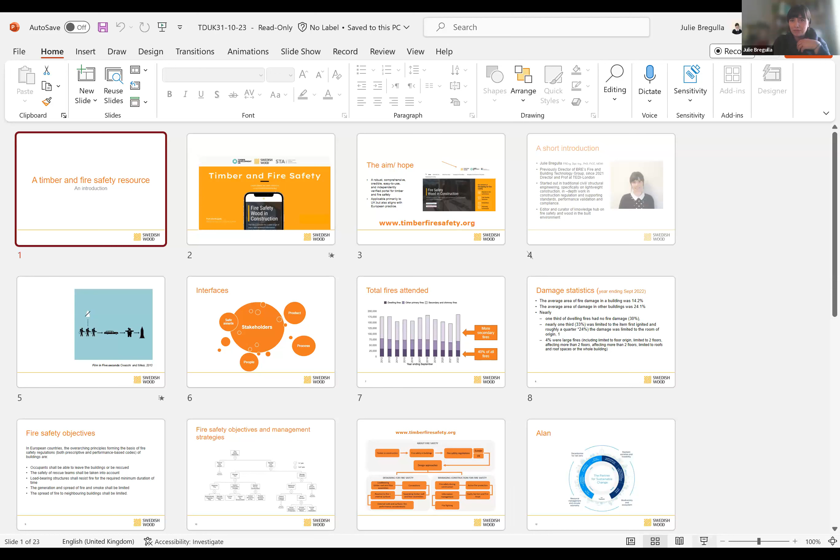So here we are. I hope Tabitha and team could confirm that you can see that. Does this work? Not full screen yet. Yeah, perfect.

Just a very quick introduction to this new resource, which has been developed together with Timber Development UK, the Structural Timber Association, and Swedish Wood. The aim and hope for this site for all three founding partners is to provide a robust, comprehensive, easy to use, but also independently verified portal for fire safety and for timber specifically. It's applicable primarily to the UK, but aligns with European practice. So when you see some regulations quoted, they are UK regulations, but it links back into European regulations and standards as appropriate for use in the UK.

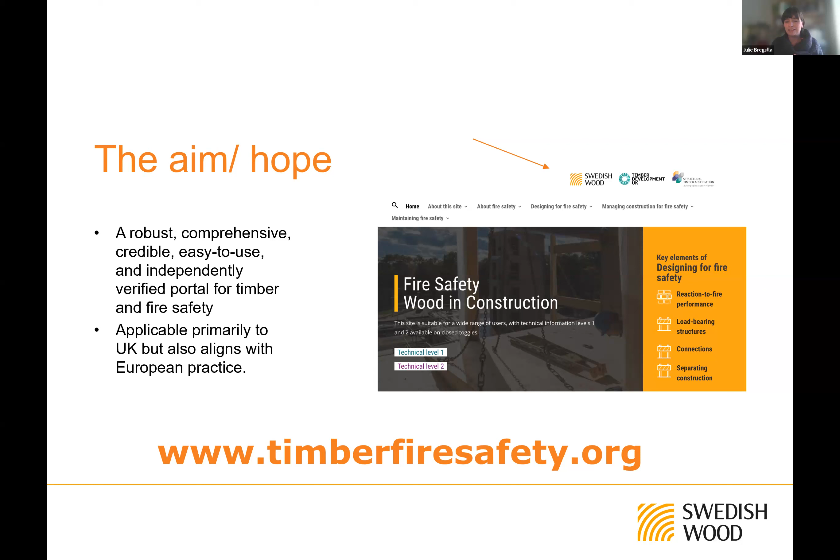It is really, really difficult. Fire safety is a hugely complex subject. I will not endeavor to be as eloquent as these two Italian illustrators that are able to communicate some of these really complex and long movies in just 5 seconds. I guess you've all guessed by now what movie that is. So I won't be able to be that quick with it. I think the main reason for that is because the interfaces around fire safety are just so complex. We're talking about safe assets, the products that we use, the processes by which we employ these products, but also the people that deliver them. So as such, it's a really complex field, and the website is here to try and help with navigating some of this complexity.

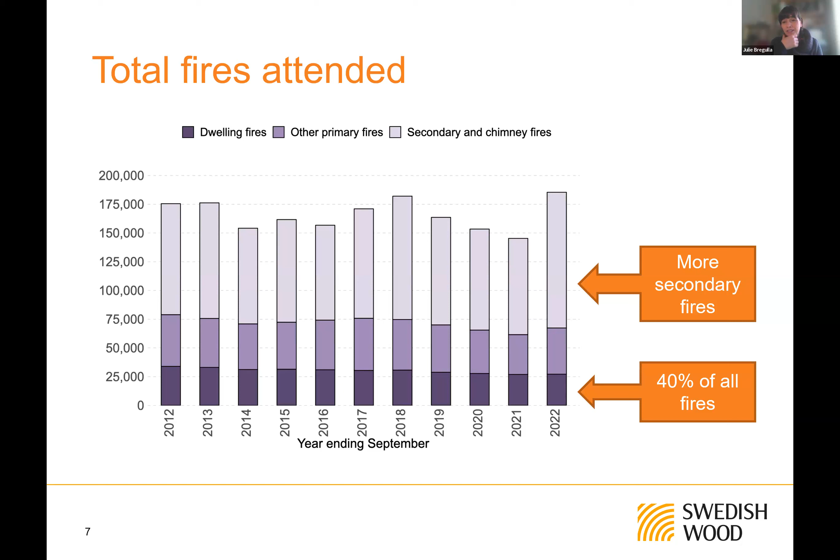It's really important. This is just the latest statistics for the UK on total fires attended in year, and you see the amount and number of fires that we see every year. So fire is a real design case. It's something that's assumed to happen once in the lifetime of the structure.

This is also an interesting statistic that I normally bring up, about the statistics of damage that we get when a fire does occur in a building. The average area of fire damage, from the statistics the UK publishes every year, is about 14.2% in dwellings, and in other buildings about 24.1%.

In 1/3 of all dwelling fires, there's no fire damage at all. In nearly 1/3 of all fires, we limit the damage to the item first ignited. And really only 4% of all fires are large fires, meaning they spread beyond the floor of origin or affect more than 2 floors. So the aim is to enable the fire to be controlled at source quickly and efficiently.

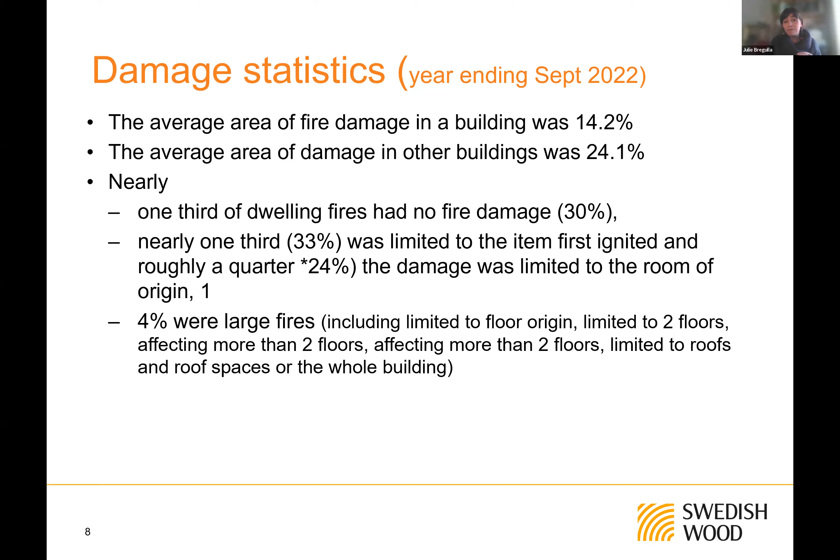That meets the fire safety objectives, which are overarchingly the same wherever you go in the world. There are 5 main aims: that occupants shall be able to leave the building or be rescued, that the safety of rescue teams is taken into account, that load-bearing structures resist fire for the required minimum duration, that we limit the generation of smoke and spread of fire, and that we limit fire spread to neighboring buildings.

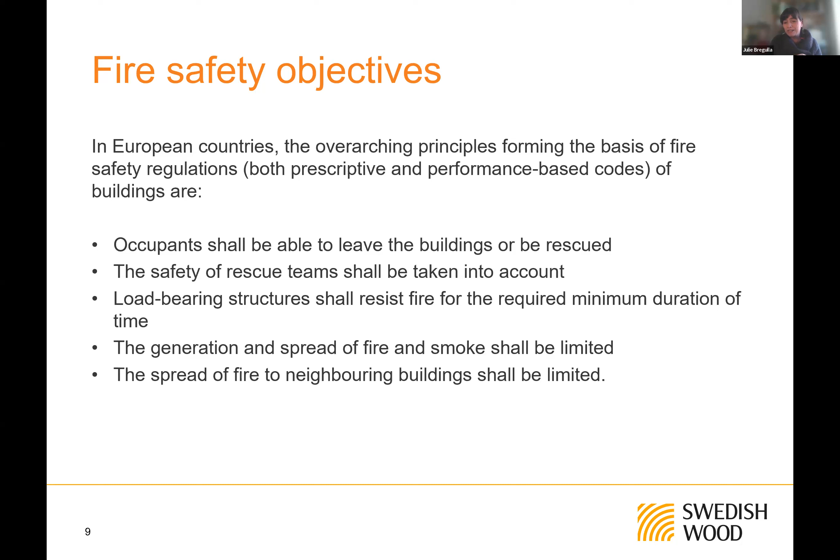These underpinning principles are where all fire safety expectations come from, and the way that we manage those and actually implement them in a completed structure.

We're not going to go through this in much detail, just to give an overview. There are always national regulations about how we prevent fire ignition, and another set of measures for managing the impact of a fire when it happens. We split that into 2 subsets: suppressing the fire, controlling combustion, and containing the fire within the construction, and what we do about the exposed structures.

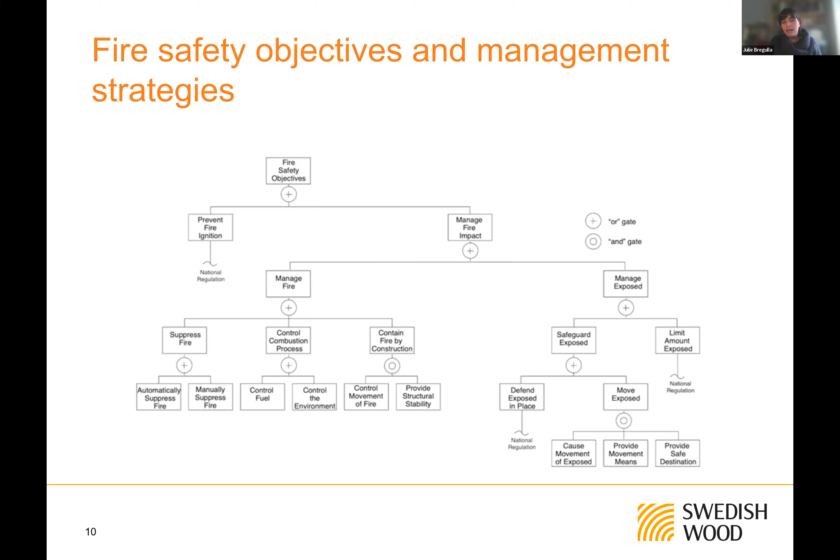Fire safety deals with all these aspects and how we deliver them. At the top there are foundational principles - where we see timber in construction, what we aim for when designing for fire safety in buildings, what regulations apply in Europe and specifically the UK, their interactions, and the design approaches available depending on the type of structure and application.

Then there are 2 pillars: how you design for fire safety around load-bearing walls and constructions, connections, separating walls, surfaces internal and external, and how we manage construction for fire safety at the start, during construction, and through life as we maintain and occupy structures.

This is just to give a quick intro to all the content covered, and Alan will show some of those principles in application. So over to you, Alan.

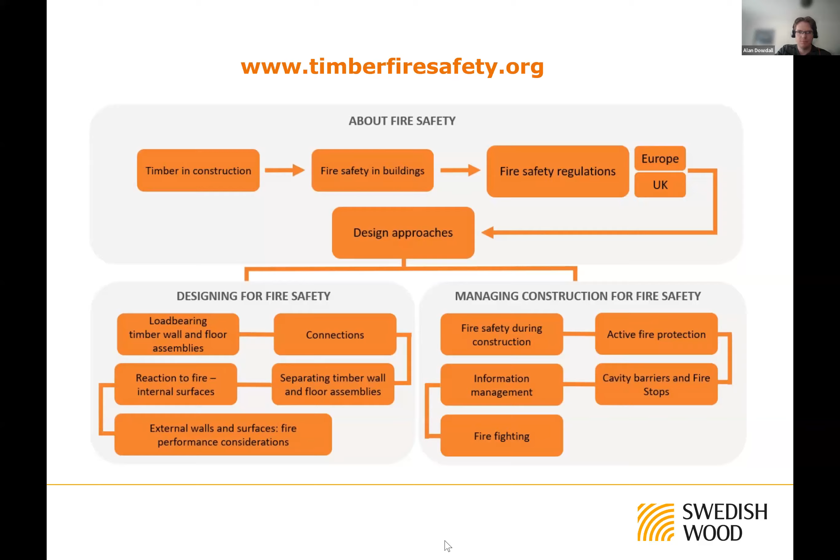I'll stop sharing now. Okay, and then it's over to you. I shall share my screen. I'll just stay not on mute until I can see it, so you know it's happened. Not quite yet. It's there. Okay, so I'm going to go full screen.

Thanks, Julie. My background is in structural engineering, I'm a structural engineer, that's what I do. So I'm going to focus these slides from a structural engineering aspect for timber and fire. I've got about 30 slides, so I'll try and whiz through these pretty quickly.

This is the flow I want to go through. I've got some project examples, which are images of projects, and there'll be a theme through that which I'll explain at the end.

Then I'll get into the nitty-gritty about design scenarios when it comes to fire, which is an accidental design scenario case as opposed to a typical case. There are differences in approach taken in the design of a structure between these 2 types of scenarios.

Following on from that, we'll have a chat about how timber behaves in a fire, how it reacts to elevated temperatures, and a very quick run through examples of detailing, particularly around connections, how we look to protect connections in timber.

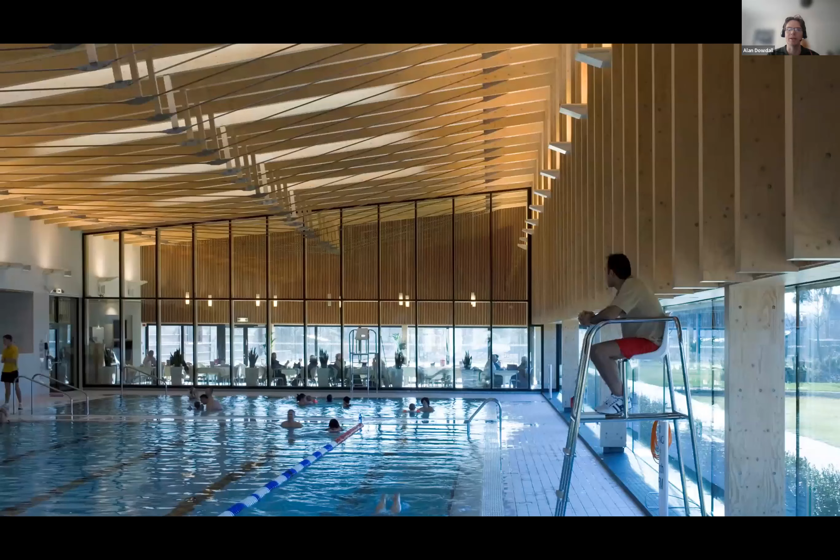This is a form-based swimming pool. This type of building is single story on the ground, and the structure is really just supporting a roof. So in terms of fire risk, it's actually quite a low profile one, and we don't tend to put a fire time on the roof in terms of design from the structure point of view. But it's quite a nice sort of frame that you get with the timber.

Other types of timber buildings we've worked on before - this is Beechwood West, which is low-rise residential, using timber modules. If I skip on, you can see this is one of the modules that goes into one of these houses, and that has a different fire risk profile. Mainly there's a lot of party walls that need to be dealt with, which we had to detail to allow for increased protection in those lines.

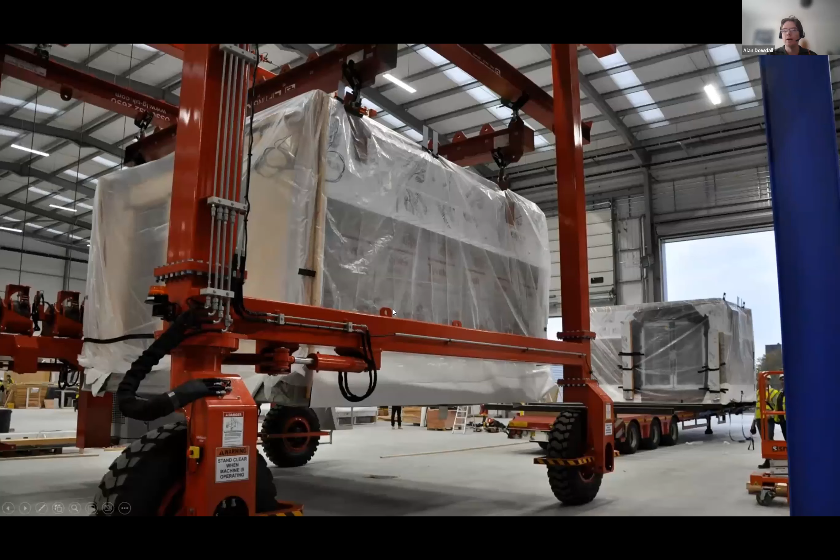We move into different scales of building, from cultural and residential to educational. We're getting into a different type of building, which comes with different design aspects to consider, as you've got a much bigger space to deal with. This is a school in Norwich, where we have a lot of exposed timber, but it's not high-rise per se.

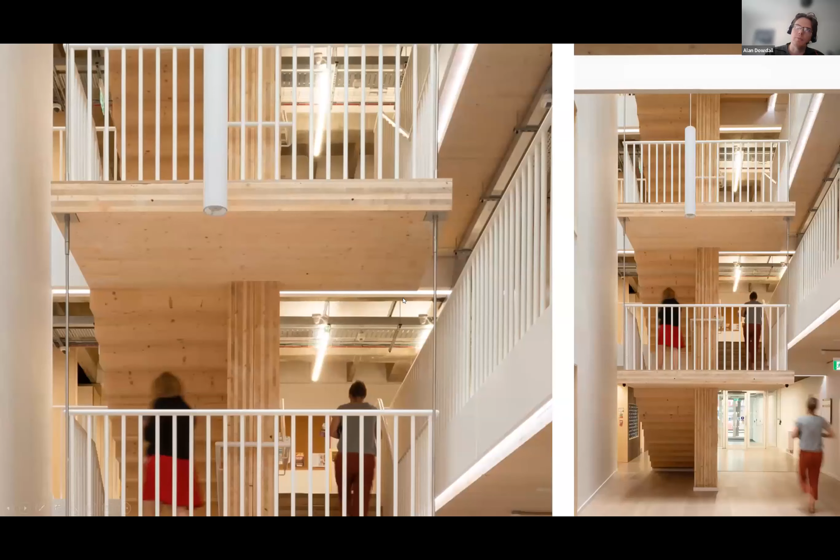Moving forward in time, what we see today is more commercial buildings. This is an office building in London, about 5-6 stories, again an extension to an existing building, done from mass timber - glulam and CLT. These are all different types of buildings, and they all have different sort of rules you need to follow when designing them from a fire aspect.

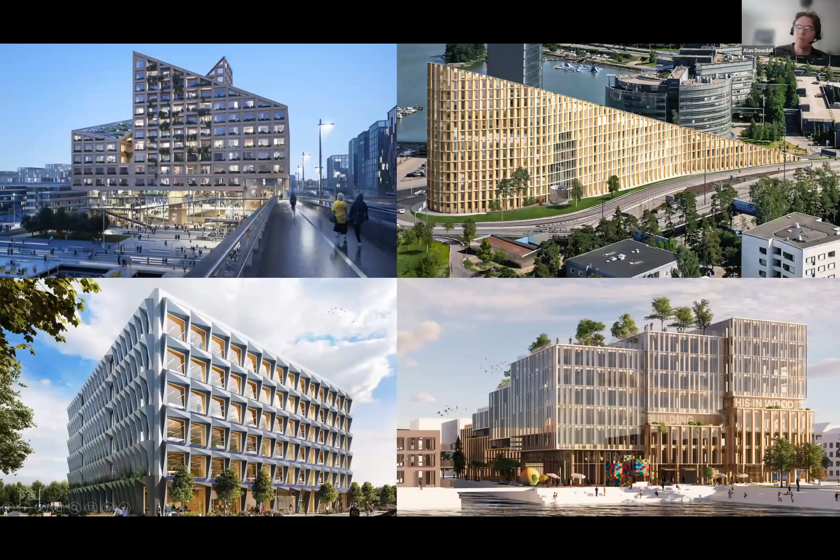Looking forward to where timber is going, this is a snapshot of some pipeline projects in the works around the UK and Europe, which are quite large scale. So there's a trend of buildings increasing in scale using timber for various good reasons, mostly around the carbon and lightweight nature of timber, and they all come with aspects of fire that need to be considered in the design. Obviously the bigger the building gets, the bigger the risk profile is for that scenario to be considered. So just taking a little step back from that and moving on to the next stage.

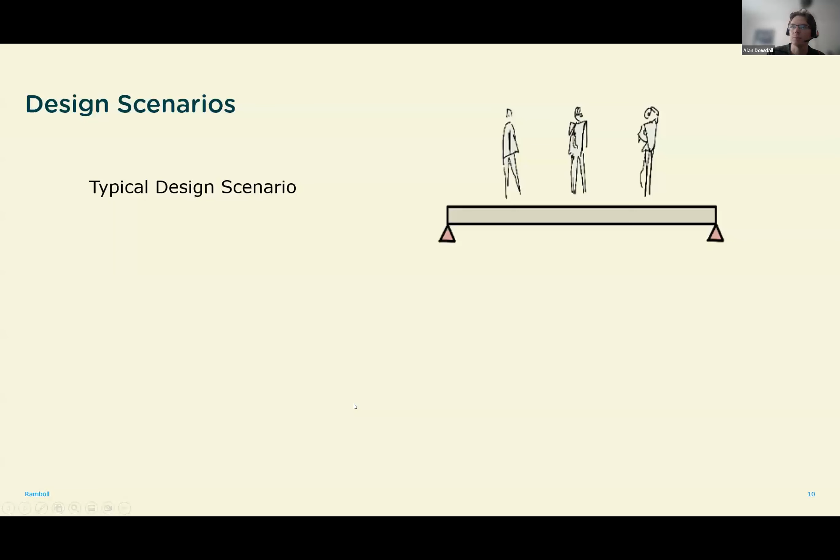Focusing in on structural engineering, and talking about how we consider our design scenarios from a typical loading aspect of a building to an accidental scenario, which is a fire, for example. So we've got the typical, and then we have our nice little graphic there that shows perhaps a fire scenario.

We compare how that works with some of the loadings and factors in, let's say for example, an office loading. We have a certain amount of loading which is more in the upper percentile. For an office we'd have 3.5 kilonewtons per meter squared, approximately 5 people per meter squared, which is quite a tight range - certainly an upper limit of what a floor would most likely experience. Some offices from studies years ago show they're more like 0.5 or even less in reality.

When it comes to an accidental design scenario, there's more of a pragmatic approach, in that the likelihood is you're going to have a lot less. So if we apply the office theme again, our loads are about half - certainly the imposed load, so the people and furniture is taken as about half. The actual finishes on the floor are still the same; they don't change.

Then we think about our factors of safety for design of strength. In a typical design scenario we're upping those loads - for live loads by an extra 50%, or 35% if it's just the finishes or dead loads. When it comes to accidental scenarios, we're keeping our factors at 1, so it's more of a realistic approach. That's how we deal with loading and our safety factors.

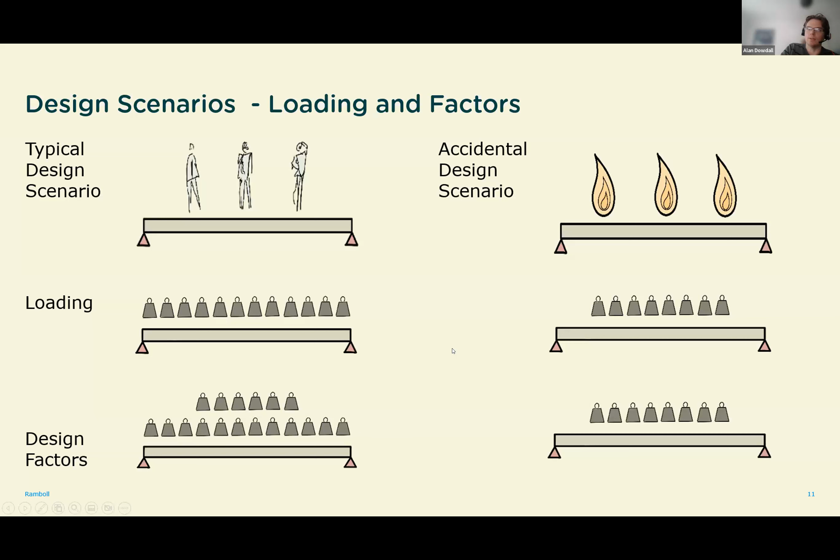When we then look at material properties, hopefully you're aware that in design of structural materials, we have a distribution of properties that any material, whether steel or concrete, will have. In design of our structures, we're taking the 5 percentile as the characteristic properties - similar to how we take the upper load for the typical design case. With timber, it's such a variable material that the Eurocode takes a different approach, where rather than the 5 percentile, that can be increased to a 20 percentile.

So for a glulam, you can get like an extra 15% capacity out of its strength and properties. You combine those two things together, you have a slightly reduced loading in an accident scenario and slightly better properties in the accidental scenario. Combine that with when we look at char later on, how if you have a reduced section, you combine all these together to work out the utilization of your structure and design accordingly.

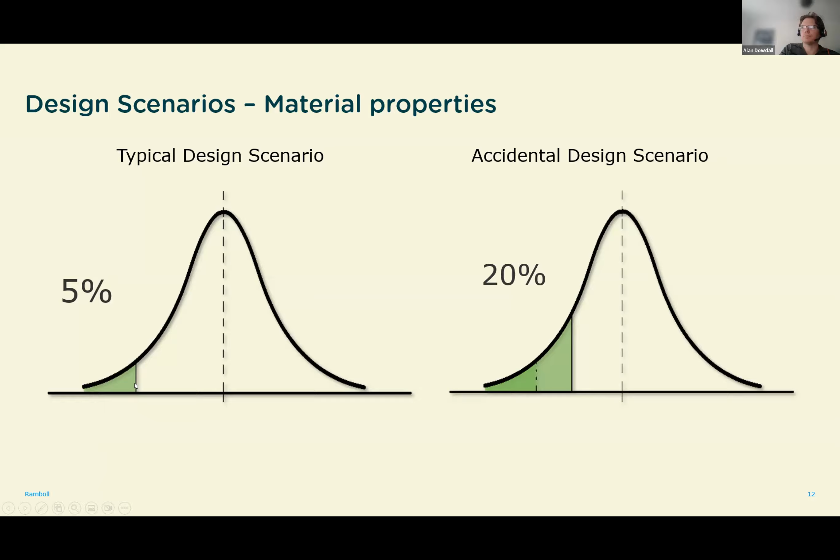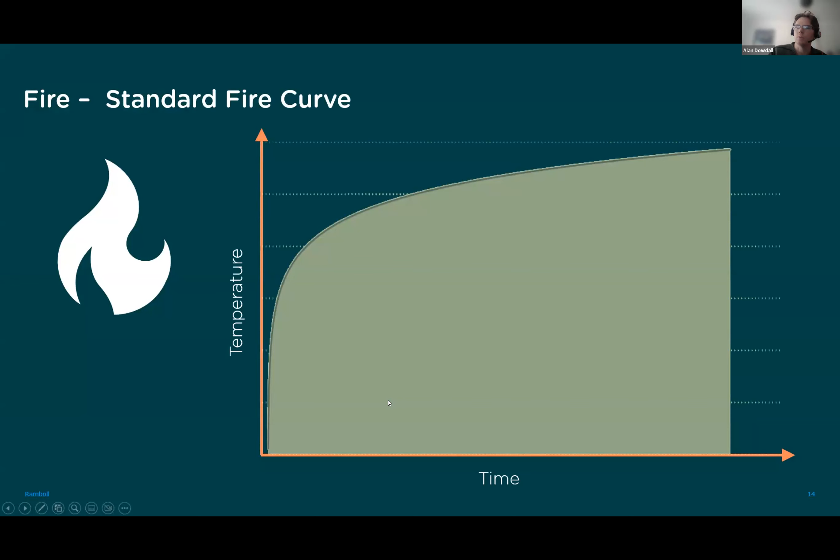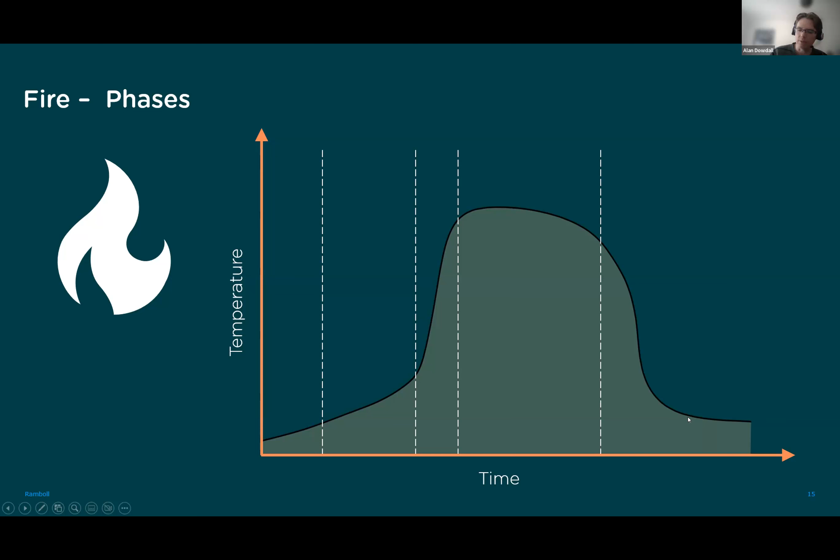In reality, how a fire dynamic would behave in a compartment looks a bit different than that. We have various stages of a fire. They tend to start off with some sort of ignition period, a growth phase, and then at some point there'll be a flashover where there's a rapid acceleration in the temperature of the space and the severity of the fire. That stays developed for a period of time, and then it will dwindle down once the fuel in that compartment has been consumed, typically. Those are the stages as you see them there.

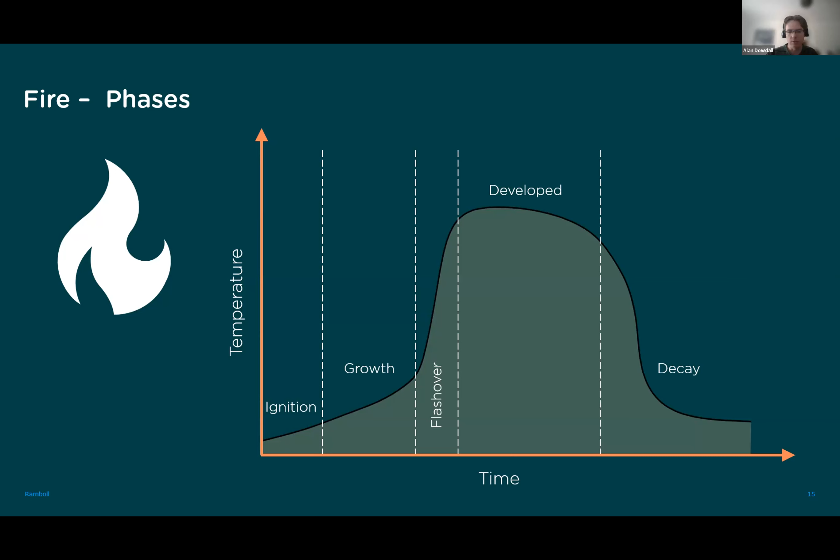When it comes to timber, if we're exposing timber within a compartment, there is more fuel in that space than there was if it was non-combustible, if your structure is made of non-combustible material. There's a possibility that depending on the fire dynamics, the space, and how enclosed it is or what the arrangement is, things can be quite different. So there's a possibility you can have a more severe fire that goes on for longer, slightly hotter, and so forth.

And certainly with some of the types of glues that could be used, if the fire goes on for long enough and if the heat line reaches a certain glue, if it's not heat resistant glue, you can get some failures that can happen with delamination in a second flashover. So it's important, I think, when you're looking at certain types of buildings, that you have a fire engineer who can understand the dynamics of things.

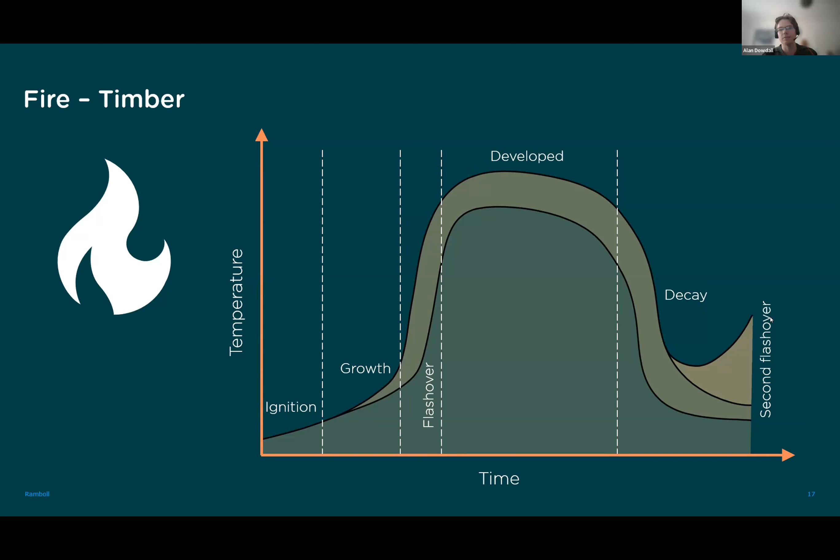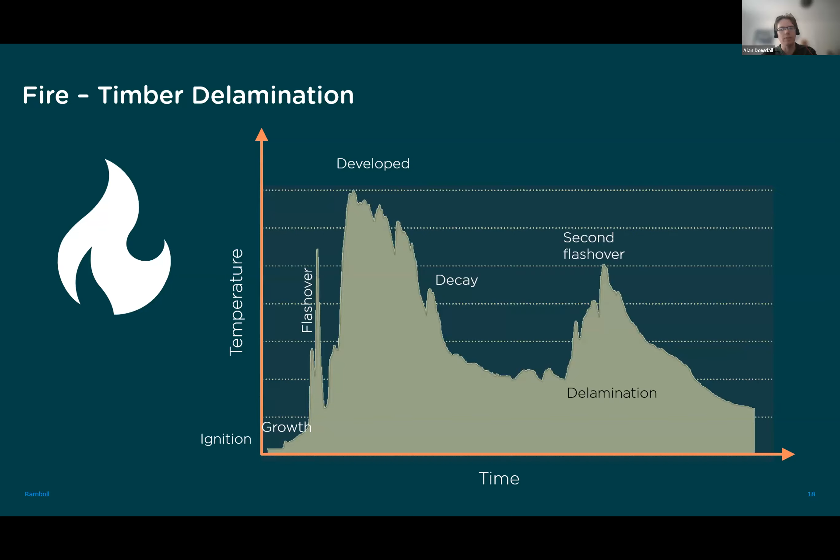There is a reduction in its capacity, which is quite sharp, especially for compression. That should be taken into account. So how do you deal with that? These are known numbers. How do you deal with it if you have a severe loss in strength due to temperature? How does that factor into your design?

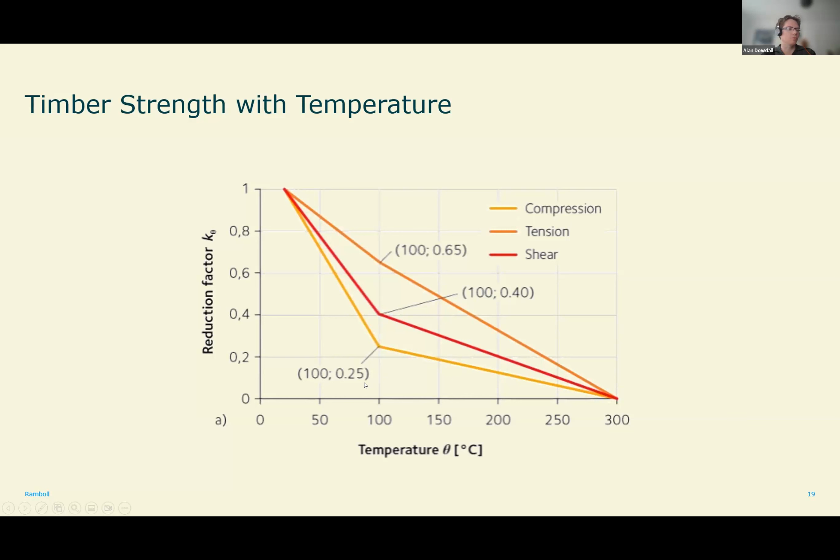Well, there's two ways really. One is, we don't actually want the timber to engage with the fire, so we have some level of protection. That can be beneficial in terms of what we're saying about the fuel to a compartment. A common terminology is encapsulation, which is covering of the timber with boarding, non-combustible boarding, to prevent that timber being exposed to a fire.

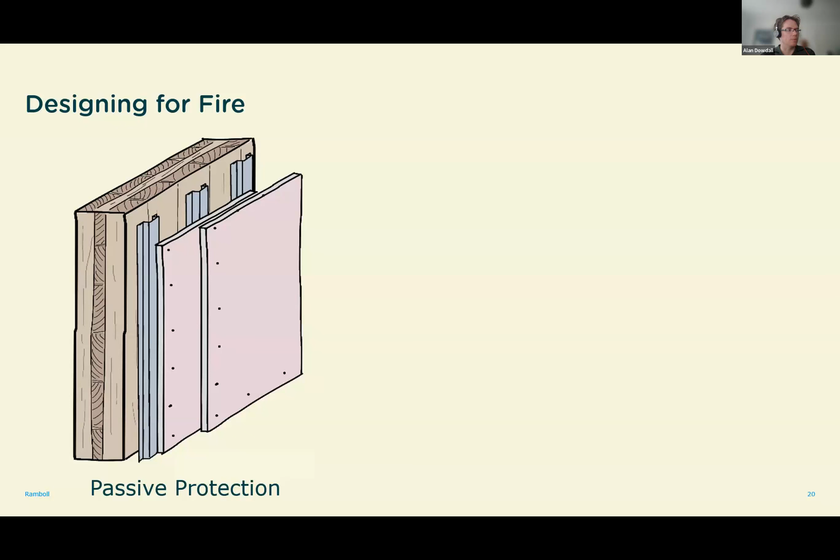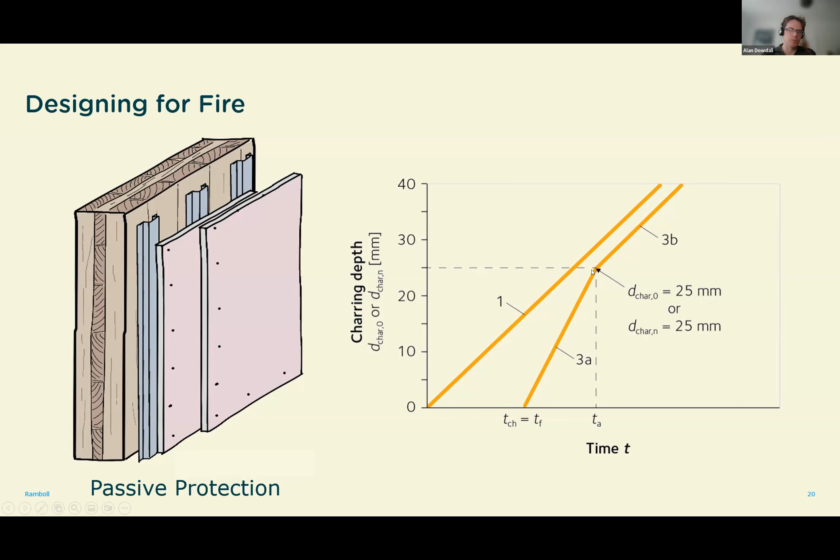Okay, other means, perhaps active protection, so sprinklers.

These days, sprinklers for timber buildings are almost a requirement based on insurance and asset protection. But from a life safety point of view, we're always assuming in a fire scenario that the sprinkler system wasn't working.

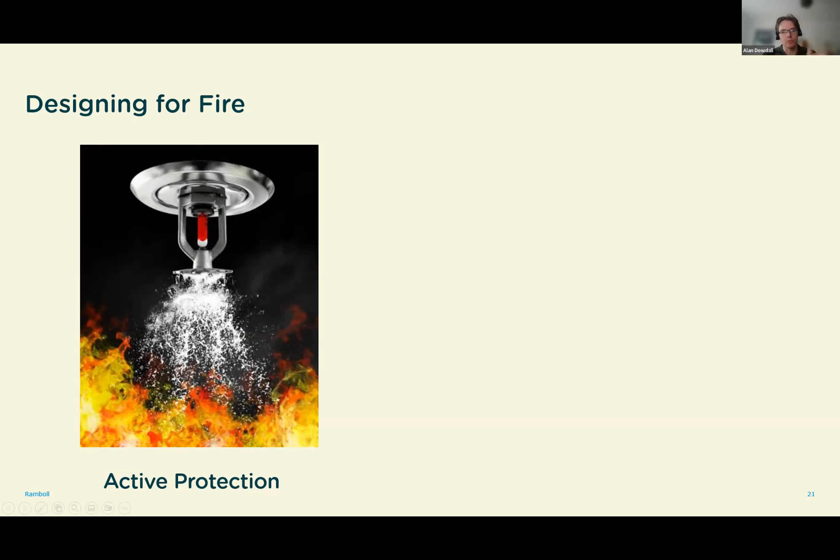So from a structural design point of view, we're looking at the natural charring of timber. While timber has low strength capabilities at elevated temperatures, the advantage of timber is it's not a conductor like steel, so it forms a char layer.

Sorry guys, I'm getting over a cold.

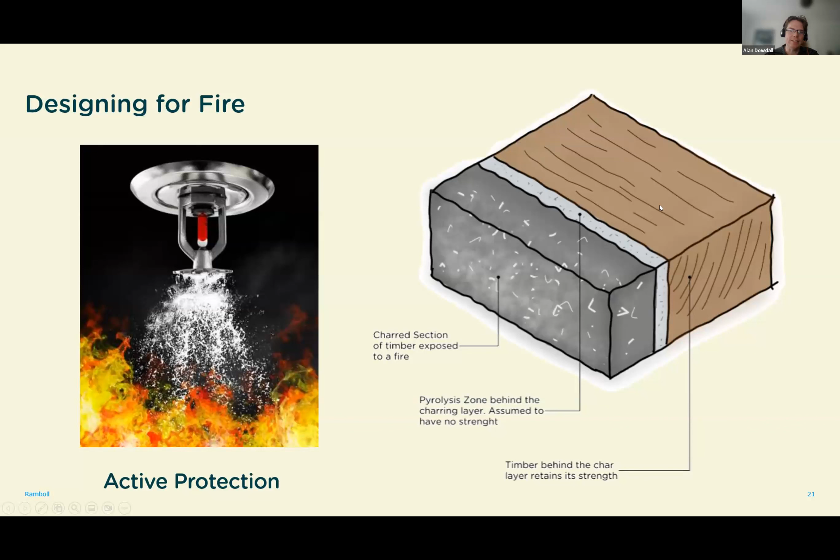It forms a char layer that has insulating properties, and behind that char layer there's a pyrolysis zone, which has zero strength and isn't taken as part of the structure. Behind that is uncharred timber that has retained its strength properties.

So charring is done at quite a predictable rate for a fire. If we're using the standard fire curve, the fire never dies away - we have a set number of minutes, and we can predict and work backwards to design our structural elements for the sizes they need to be. In many cases, depending on the building, if we have 30 minutes or so, we can.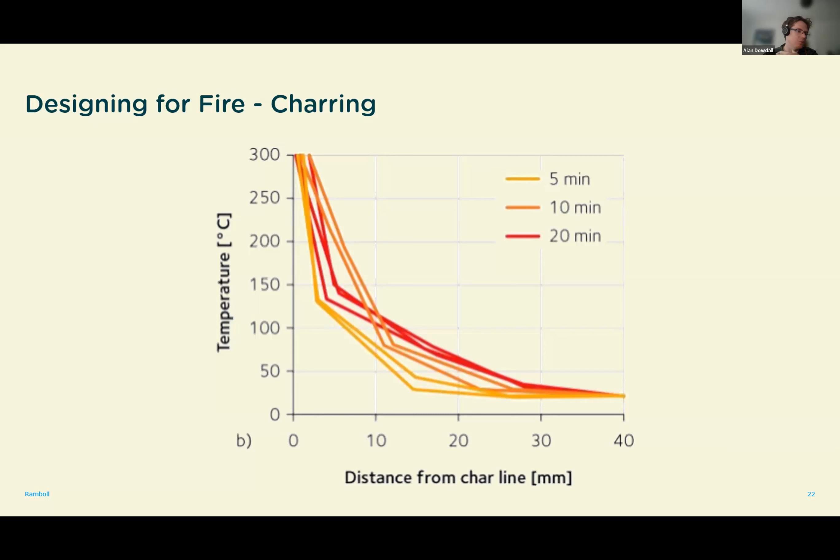Fire scenarios are really the critical factor for our members, which tends to have some of that inherent protection built in. There is a difference between panels and members - if we have a panel, there's a certain char rate, which is a flat rate.

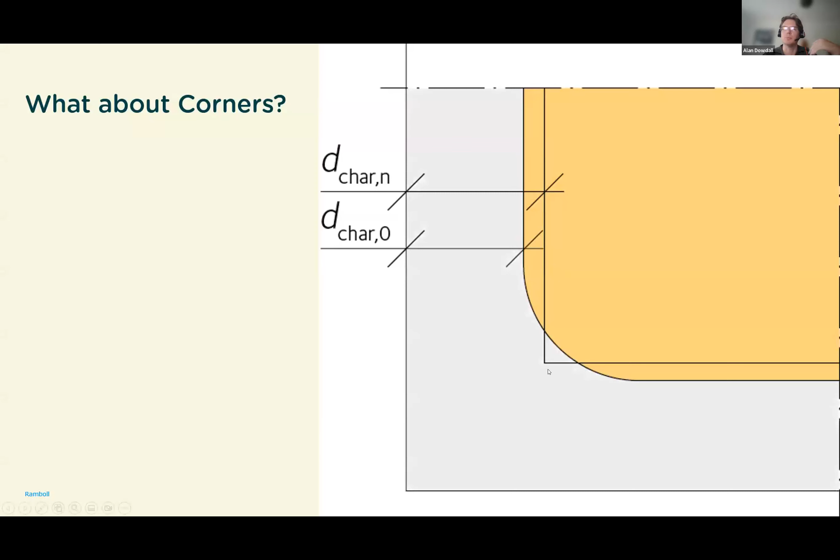When it comes to corners and beams, there's a rounding off that happens. So you have two surfaces that have been charring, and they have a rounded surface, and that is compensated for with different char rates to deal with the loss of a rounded edge - you overcompensate to remove a few more additional millimeters of timber.

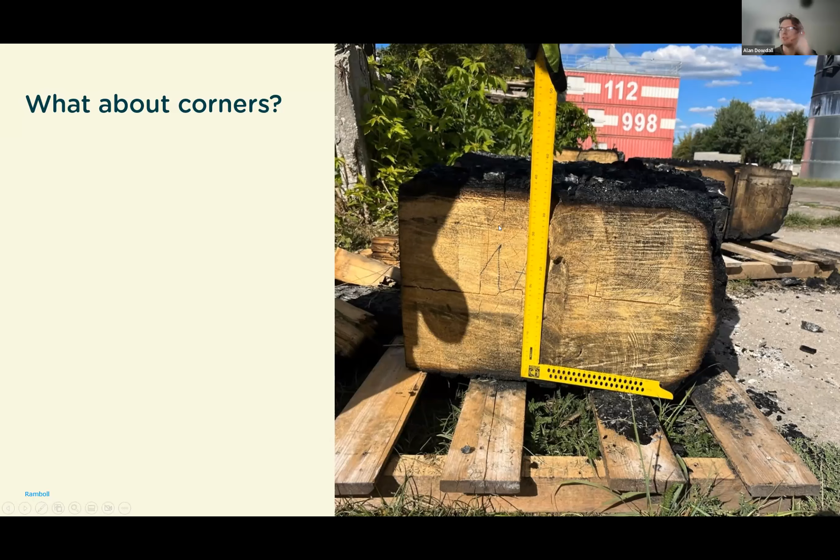So just thinking about glues as well - glues in products will have an impact on the fire performance of timber, and there are several types of glues available in the market. If we categorize them, some are heat resistant and some are non-heat resistant. I want to put this in context with the graphic I showed earlier - if protection was to fail, you get that elevated charring rate.

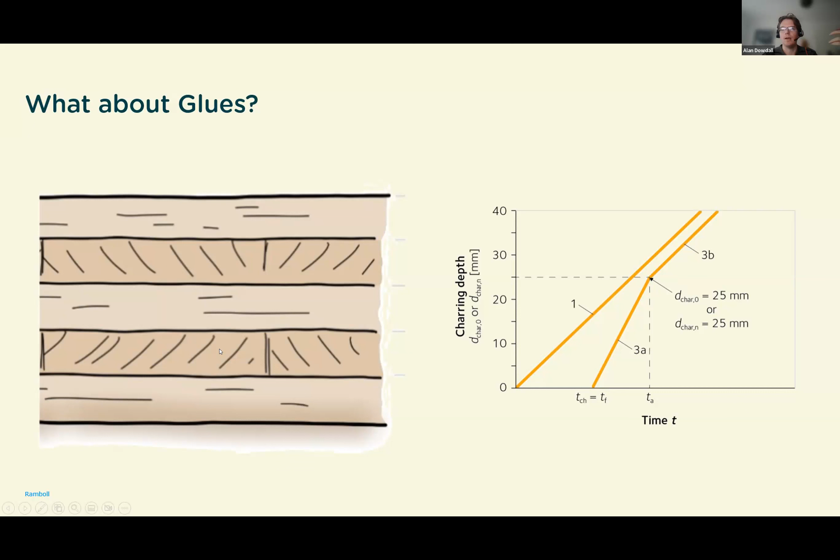In this case, if the charring line hits a glue line, or the heat temperature hits a point where you get bond failure, there will be an elevated charring rate, which is double for a certain amount - in this case, 25 mil - before it then settles back down to its normal, typical slower rate of char, because it's insulated from that bit.

So if we take this as a CLT section, if we have one product with a heat resistant type of glue, say MUF, that will give you a level that is consistent over time, and the charring depth is as expected. If we do get some delamination, then we need to account for that, and that's where we get the higher rates when delamination happens for a certain part of the section.

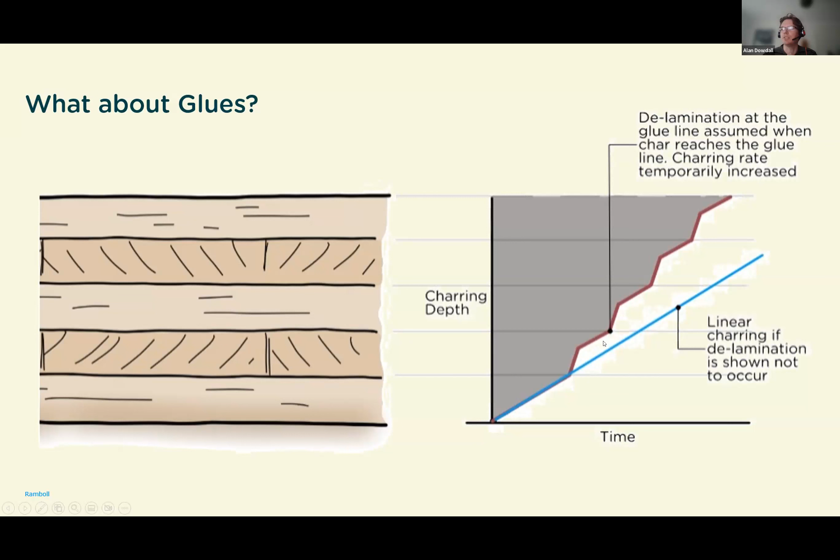Okay, then moving on about detailing connections. Really, if we look at what a typical connection entails, it's generally connecting two members together. The image here is basically a column to beam connection. It's very familiar to most structural engineers, and when it comes to timber, we are using metal connectors 90% of the time, if not 100 at the moment.

What this does is we've got typically a flitch plate or a steel T section that's fixed to, say, a column, and then the timber member, glulam member beam, comes in, and it's doweled through the beam, through the metal connector, and it bites into timber from there. If you're exposing timber, there's usually a plug to hide the fixing. But this is just an example. Sometimes it's bolts and whatnot.

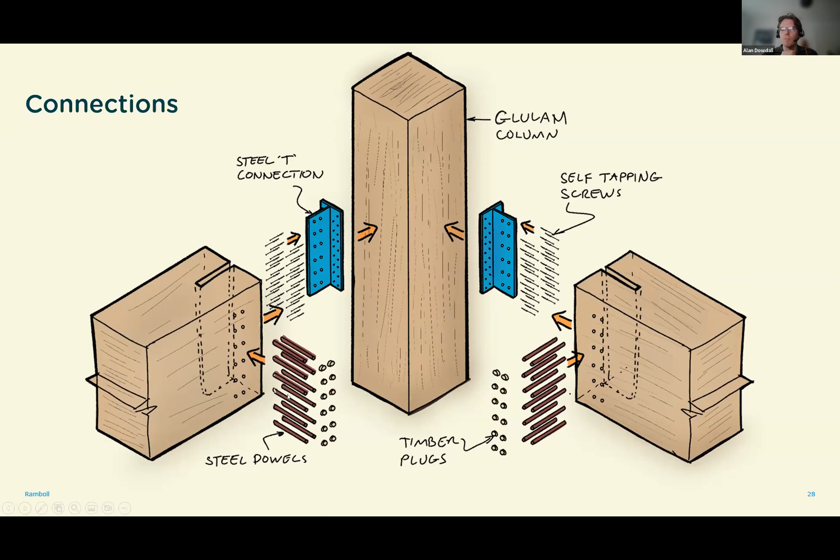So I'll just go through an image. This is sort of an example of what that looks like. You've got your column, and there'll be a beam coming in to the side, and looking up above. This project is just behind the back, King's Cross, so if anyone's around there, you can go and see it. What you can see is we've got these plugs, and all these plugs are actually quite deep. They're what we want to avoid.

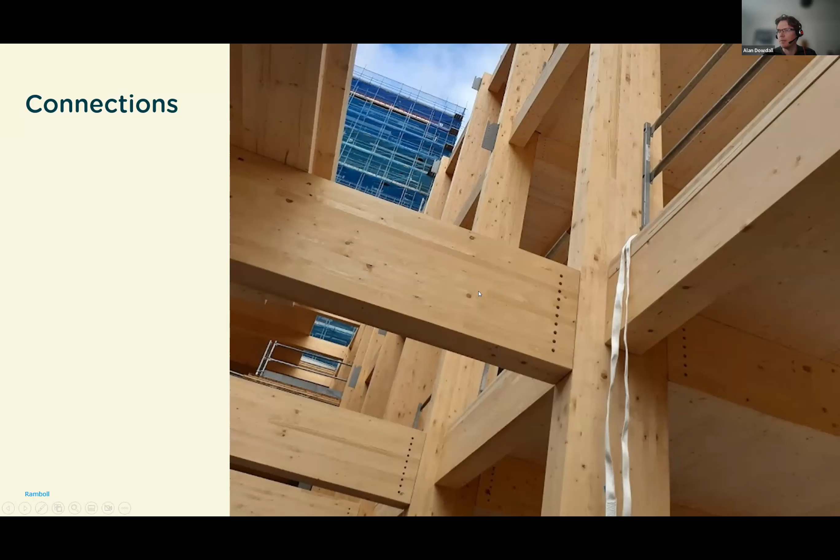As I said earlier, metal is a conductor. We want to avoid the temperature getting to the connector and softening that metal, eating into the capacity of the connection to work. So we're putting strips around the side so the temperature can't get into the connector. Where we put in the dowel connectors, we are plugging them with timber, using the char rate on timber to size those plugs so that the metal will not experience the heat from the fire. You can see something that's quite deep, and that's to allow for that to happen.

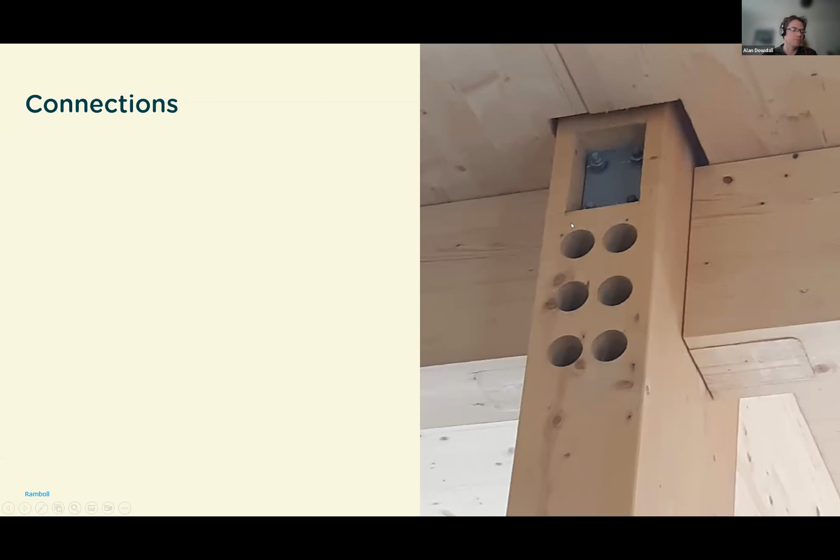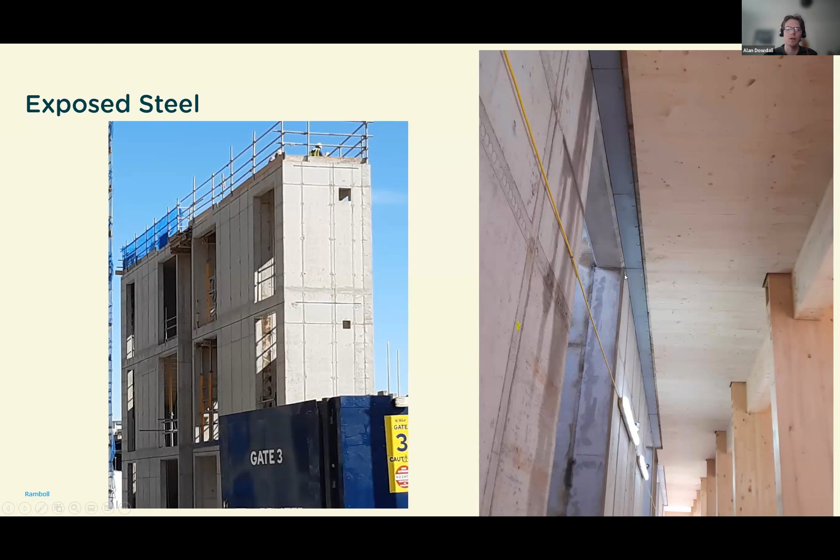It's also worth noting most buildings really are actually hybrid structures. So there's always going to be probably some level of steel this is the core of that building, and surrounding that is your timber frame. If you're going to connect to that, there'll be some sort of metal fixing typically. So you still need standard intumescent painting to fix that, to protect that metal from elevated heat. It's not much different than before.

Just a final slide, really, I just want to talk about hybrid frames. There's a tendency in some schemes to look to reduce the height. If you're doing a combination of steel and CLT, you're raising the steel beam up into the CLT. The point I suppose I want to get across, it's quite easy for structural engineers to think about the structural integrity requirement, but we should also be aware that there is an REI requirement.

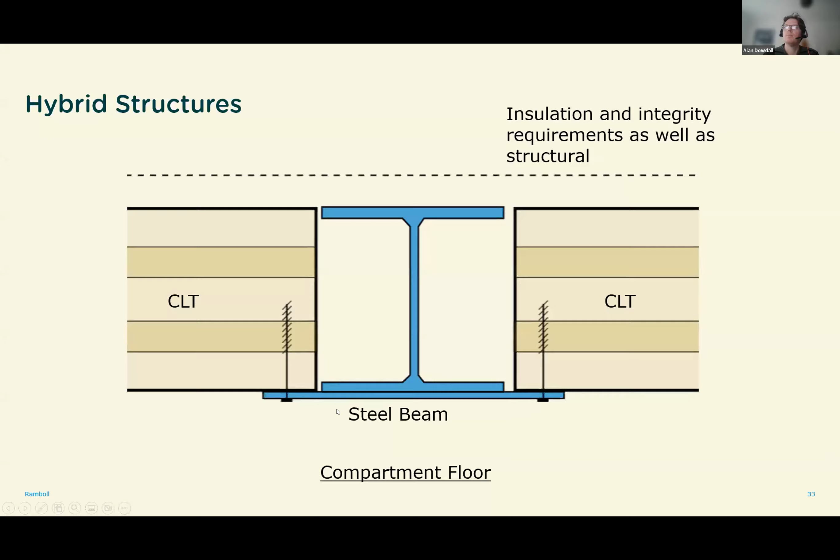So R is structure from the regulations, on the approved documents, I should say. The insulation and integrity are also a requirement, and what we need to be considering as a design team is if we have a steel beam like this, is that going to conduct a temperature gradient up to the next space, and does that need extra coverings to stop that temperature, which is about just under 200 degrees between compartments, to meet that compartment requirement. So there's things to consider beyond just the R value, but in combination, not just with structures, but design team and fire engineers and so forth. Okay, and those are my slides.

I think we're probably on time. I'll probably hand back to you, Julie, to talk a bit more about the website. Yeah, thank you so much.

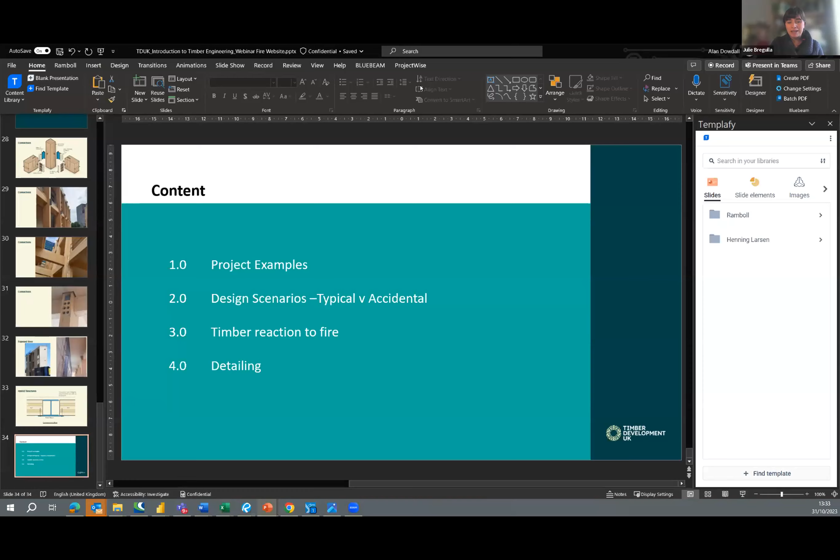Yes, I'm going to just share back. So this is the final bit that we wanted to show you. I wanted to really link a little bit some of the concepts that Alan has talked about and show you a little bit more about how the website helps you with that and with your own project.

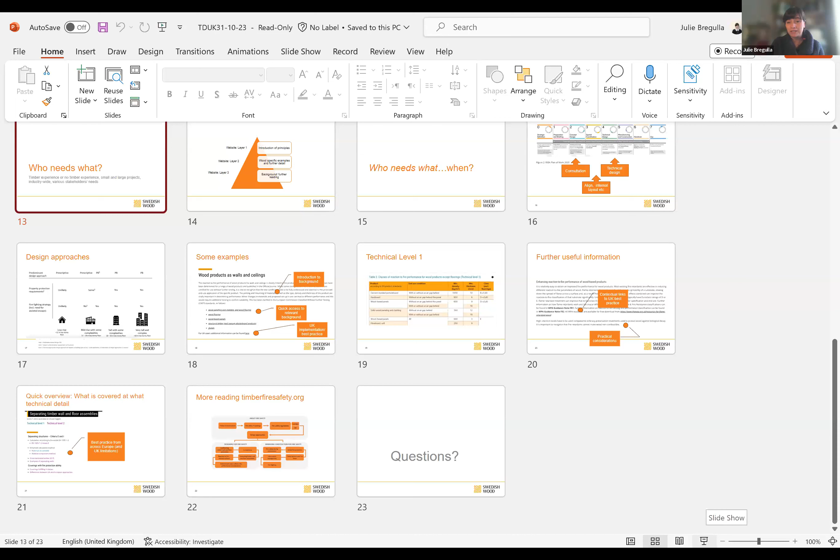One of the bits we've been really thinking about is to who needs what, right? So you all come with very different experiences. Some of you have already worked with timber, some of you might have not. Small and large projects. Alan has showed us some of the larger projects, but of course, some of you might be timber frame dwelling projects, so there's a real range. And actually, it's industry-wide, with many and various stakeholders.

So to help with that, we've really organized all of the topics surrounding fire safety and timber specifically into 3 layers: an introduction of the principle that is generally material agnostic, so this is the principle that applies and links to those objectives that I've shown you at the start, and then in the second layer, some specific examples which relate to timber.

So how would one meet the principle if you were to choose a timber solution?

And then a third layer, which is really getting into quite a bit of detail, maybe some further reading, cross-referencing to other places where you might have more detailed information, where some research is ongoing. We completely appreciate that depending on where your knowledge level is at any one time, you might access different parts of this information. You might be really good at one topic and know everything about it, but want to understand a little more about something else. So really what this is trying to do is not to replicate or add information, but to organize it in a way that allows you to access and understand it in context to the principle you're trying to meet.

The next thing we've been thinking about a lot is when do you need this sort of stuff - who needs what, but also when do you need it? So when we designed the site, we've really been thinking about these RIBA stages. We think it's a good resource for you during the consultation stage, at concept design, when you think about your fire safety strategy. When you do high risk and complex projects, your qualitative design review, for example, when you start thinking about performance objectives, that's a good time to use the site and find information relevant to that.

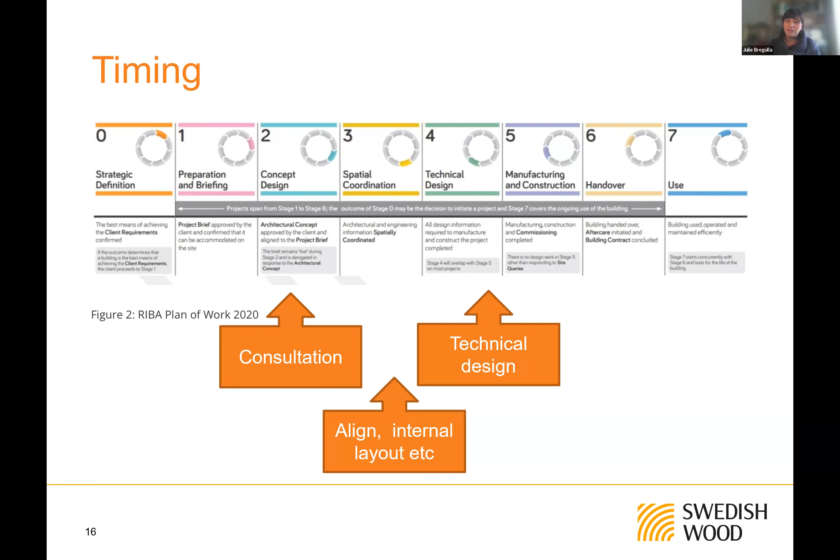In RIBA stage 3, when you think about internal layouts, agree assessment methods, talk about input parameters with your clients and supply chains, when you start speaking to authorities, this is a good time for the website as well. And of course, in the technical design, which Alan has shown you some very specific details from his experience and projects, which are amazing and really innovative around timber as well. So this is what we've been thinking the website should be catering for.

I wanted to share this with you because timber, increasingly so, is used in a range of applications, and we've given you information around when you might find particular types of these strategies we talked about, from prescriptive to performance-based design, to when there might be a mix depending on the type of structure you have by height, but also the complexities, the protection requirements you might see, and the firefighting strategies you might employ for structures like this.

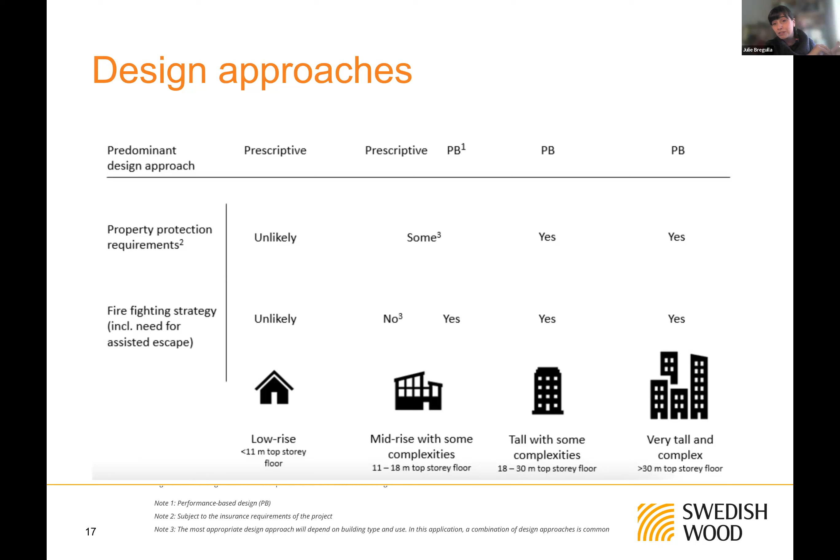I think the examples we've seen with Alan were more on the tall with some complexities, or very tall with complexities type bits. But of course, we've also seen one example of residential construction, where you might employ slightly different techniques.

This is really my last final slides, but I wanted to show you what the site looks like when you click on the link, which Tabitha kindly left you in the chat. So this is a typical example, and Alan covered a little bit reaction to fire, so how timber surfaces react when they're exposed to an accidental fire event.

And this is how it would be - this is a typical introductory bit. What are we trying to do? It introduces some of the background, where you might find some of the relevant regulations and standards for this. So you get quick access. All of this stuff is cross-linked, so you can read and quickly get yourself into a different place with a cross-reference, which is kept up to date.

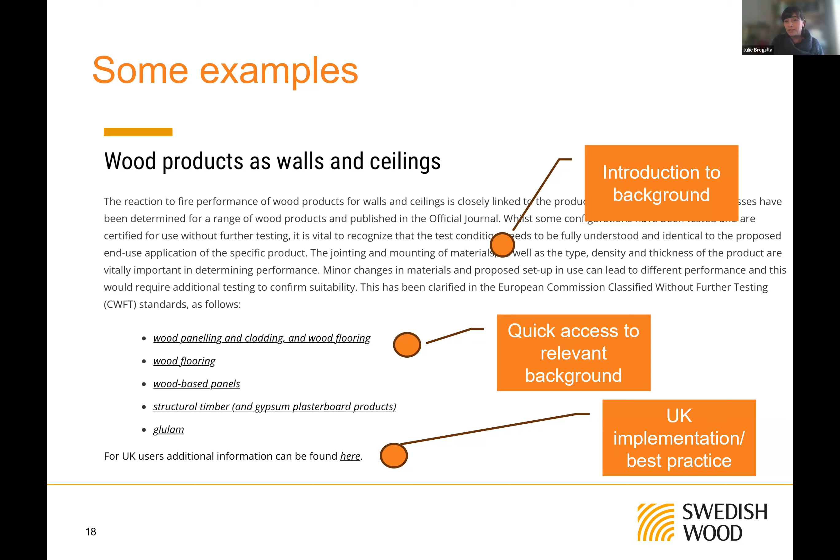And then also for UK users, you get some really specific UK implementation best practice on the site to guide you on that. If you're really in the mood and think, yeah, I get all of that, I know all of that, I want to just see what happens actually with timber specifically, this is a typical level 1 type information, where you can unclick a bit of more detailed information about what the product might be like, what might be the end use condition, and what might be the typical ratings, for example, that the reaction to fire classification might be. So that's a good example of that.

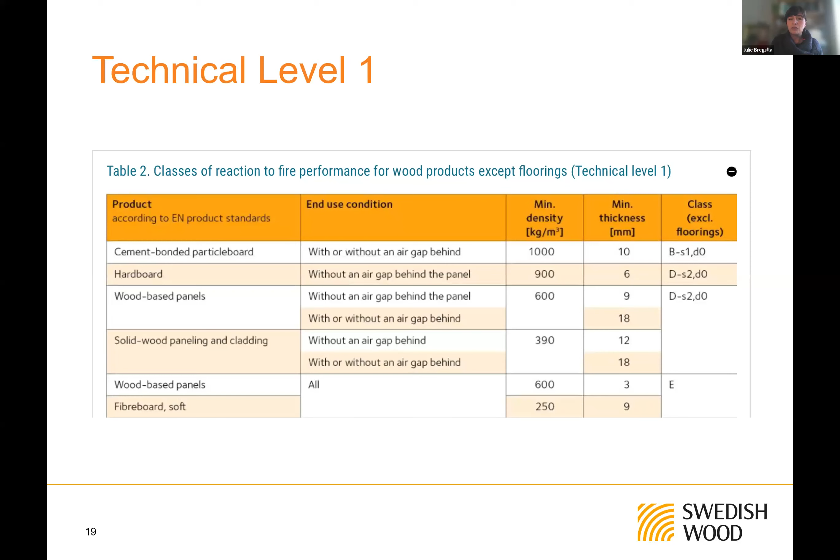And then I think what was really key for us, and further useful information, is to really allow you to cross-reference and cross-link to best practice from across the UK, in entities that do this really excellent work around enabling timber and safe use of timber in construction across many.

This, for example, is sort of contextual links to UK best practice from the Wood Protection Association, for where you might find additional information on fire retardant treatments and bits and pieces like that. Where possible, we've given some really practical considerations to think about, like high retention levels - what does that mean when I'm speaking to my supply chain? You get a little bit of background to inform your discussions here.

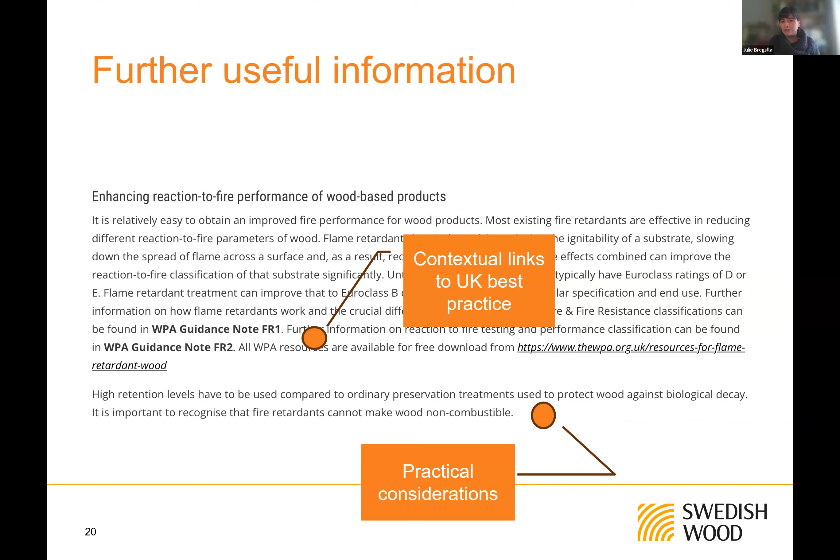And then some typical examples where you can go to best practice across Europe with UK limitations. You might pick up Eurocode and see a couple of tables in there, but it will also explain which tables are applicable in the UK context and which are not, and what you might do instead.

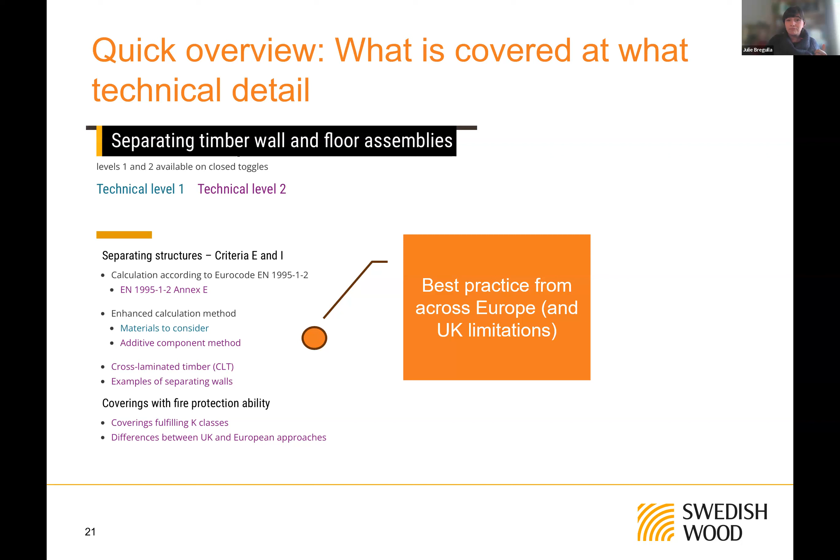So that's really it. I think you've seen a little bit of everything here today, some excellent examples of timber construction in Alan's remit, but also some of the information you might find. There's lots more to explore. The final thing I want to say is it's an updated site - the three founders, Timber Development UK, Structural Timber Association and Swedish Wood, have committed ongoing funding for this site. So please return to it often. There'll be additional information, additional content, and updates as our regulatory picture changes - so will the site. This is really an important go-to resource that hopefully will accompany your projects from here on in.

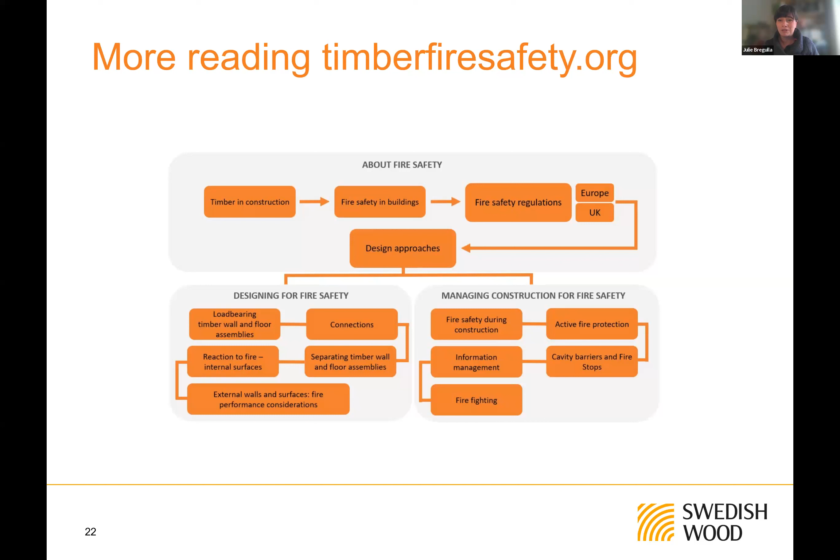I'll stop sharing. Yeah, thank you, Julie and Alan. Absolutely brilliant, there's such a wealth of information. Just on your last point, Julie, absolutely fantastic that it's going to be updated.

How do people, if they come across something, get in touch with you? How would they put something forward?

Great question. So on the actual website there will be a leave-a-comment section, so you can get in touch. It's not live, so there's nobody sitting on the other side responding in real time - it's not a Q&A type interaction with the site. But this is a very complex subject that changes quite a bit, so if you spot anything, or if anything isn't clear, or you think 'I thought that had moved on,' this is the place to tell us, and we're hugely appreciative of that. It is curated and looked after all the time, so please, anything you find or would like to see is great to put there so we can put that into our work program.

Brilliant. Right, we've got a flood of questions coming in. Some of them you might be able to answer, some not. I'm just going to go through them as they are.

So Alan, probably one for you from Niall: How do you deal with charring at a timber bearing connection? Is there increased charring at the interface - for example, a beam bearing on a column? Alan, do you want to take that?

Yeah, fair enough, I'll take that. Timber likes to bear - that's my answer in terms of any connection detail. If I can get away with it, I'll try and bear timber onto another member, as opposed to using that connection detail I showed before, and that makes it a lot easier, because it performs a bit of a seal on top of itself and protects the insides. It will char, but we've got that extra charring rate I talked about for members where there are corners involved. Bearing timber on timber is the best way to go in my experience. There will be some metal connections in there just for tying purposes - probably a dowel of some sort - and as I was saying, those dowels are plugged with timber to avoid the heat getting to the metal fixing.